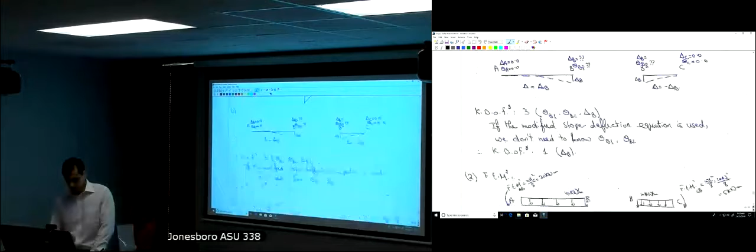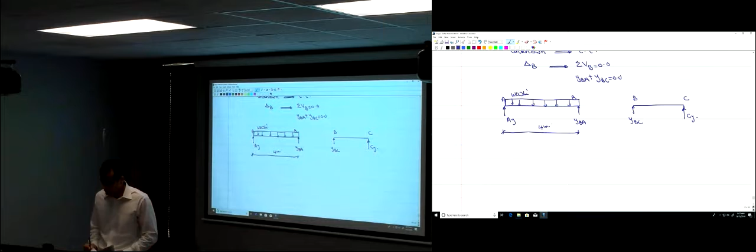The length of that member is 4 meters. We have an AY, YBA, and I'm just going to remove this uniformly distributed load and put an equivalent force. How much would that equivalent force be? 40 kilonewtons, 10 times 4, right in the middle.

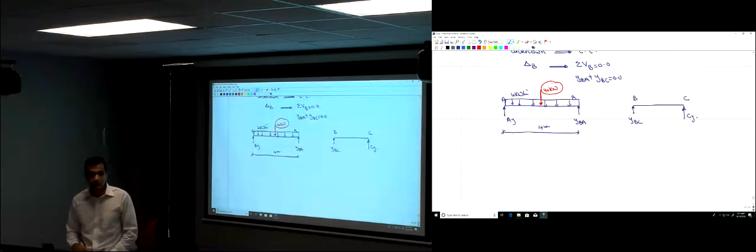Am I missing anything here? I'm drawing the free body diagram of member AB. This is the free body diagram of member AB, your moment at A.

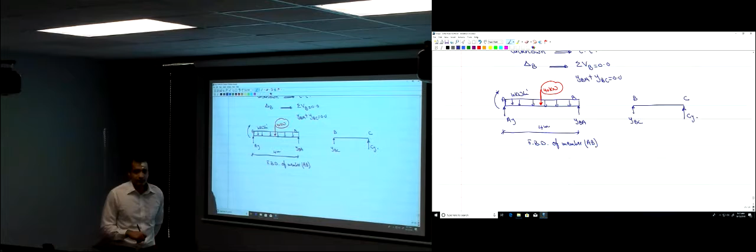Do you know how much is the moment at A? Still, you didn't calculate it yet. So just put it in the positive direction, according to the slope deflection notation. So this is MAB. You don't know how much MAB is, but this is now the free body diagram of this member.

So now, let's study the equilibrium of member AB. I'm just going to take the summation of the moments about point A equal to 0. What do I have here? I have negative MAB, it's rotating in a clockwise direction, and then negative 40 kilonewtons multiplied by 2. What else do I have? YBA. Positive YBA multiplied by 4 meters equal to 0.

From this equation, I would find Y, this is YBA. YBA would be equal to... just move those terms to the right side of the equation so they become positive. So we have MAB plus 80, and then you divide this by 4. So YBA is equal to MAB divided by 4 plus 20 kilonewtons. I'm just going to call this equation 3.

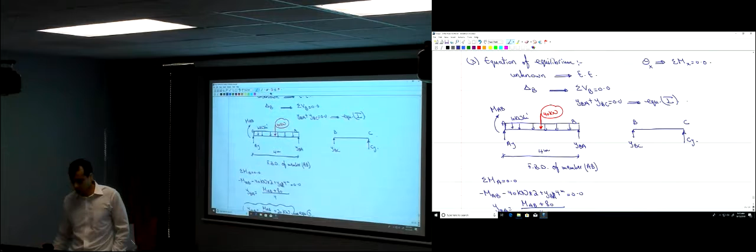Here we have this equation, I would name it equation 1. So now, what I just did, I represented YBA as a function of MAB. Why is that? Because I had an equation for MAB that is related to delta, the delta B that we're looking for.

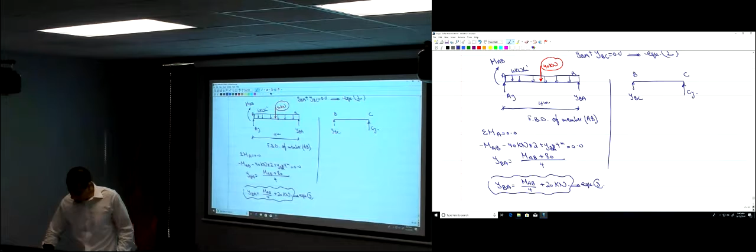Now, I want to do the same thing. Study the equilibrium here of member BC. So I need to draw the free body diagram. So all the loads, I have to draw all the loads here. You have a uniform load. The length of this member is 2 meters, you have 10 kilonewtons per meter applied on it.

So you're just going to remove this uniformly distributed load and put its equivalent force. How much would that be? 20 kilonewtons right in the middle. What else do I miss here? Moment at C, the moment at C.

Do you know how much is this? No, you still didn't calculate it, you just name it MCB. Since you didn't calculate it, just put it in the positive direction. What is the positive direction? Down. Clockwise.

So now, I need to calculate YBC. How to calculate YBC? Summation of the moments at C equal to 0. So now we have, if I take summation of the moments at C, we have negative MCB, we have YBC multiplied by 2 meters. What else? 20... this is negative, sorry, and then positive 20 kilonewtons times 1 meter equal to 0.

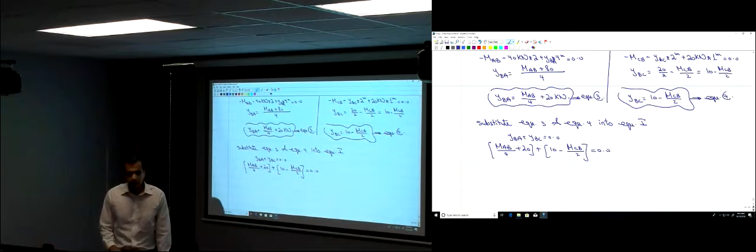Did I reach what I'm looking for? Why am I writing the equation of equilibrium? What's the purpose of writing the equation of equilibrium? Find delta. Is this an equation in delta? Do you have delta here? So where would you get the delta?

We could solve for MAB and MCB and plug them back in. Exactly, so substitute equations 1 and 2 into this equation.

Okay, so we had MAB. How much was MAB? MAB was negative 3EI divided by 16 delta AB minus 20, right? So you divide this by 4 and then add 20. So this becomes, the first term is negative 3EI divided by 64, because you divided 1/16 by 4, so that becomes 64 here. And then here you have this delta B, and then plus 15. And then the other part here, this becomes 7.5 minus 3EI divided by 8 delta B.

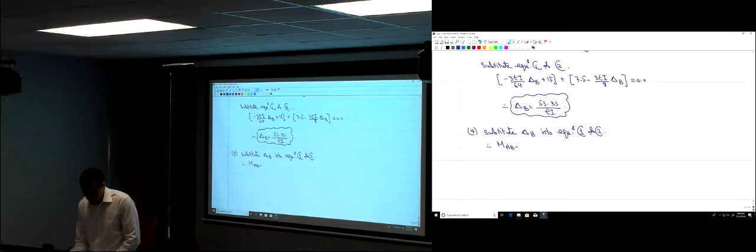So you will find that MAB is negative 30 kilonewton meter, and MCB would be 45 kilonewton meter. So now our beam looked like this.

This length was 6 meters. Now I know those moments. How much is MAB? It's negative — according to the sign rule for the slope deflection, this came from the slope deflection equation. Negative is counterclockwise, so it's in this direction, 30 kilonewton meter. MCB is positive, so it's clockwise, 45 kilonewton meter.

Now you can go ahead and draw the bending moment diagram. How to draw it? Just take the moment at the critical points. What are the critical points here? Just point A and C. What about point B? Point B is not an end of a uniformly distributed load.

You can think of this as just one load — there's nothing interrupting it other than this internal hinge. For drawing the bending moment diagram, if there's no concentrated force or a uniformly distributed force that ends there, you don't need to calculate the moment at point B. You can just treat this as one uniform load from start to end.

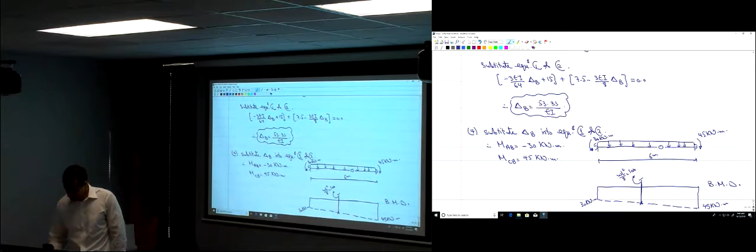So here the moment is negative 30, and here this is negative 45. Then you connect those two points by a dotted line, and from the center you go up by WL squared divided by 8. W is 10, L is 6, so 6 squared divided by 8. This becomes 45, so definitely you're going to go up — it's going to be positive, and it goes like this.

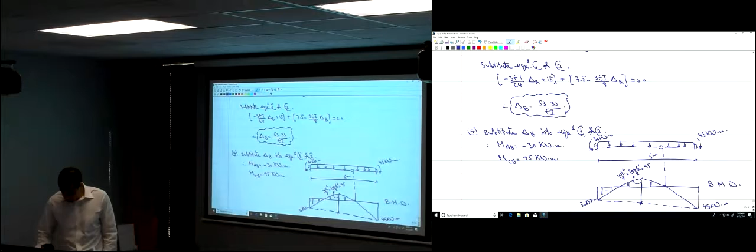So that's the bending moment diagram. While drawing it, you just have to see that the moment passes through 0 here. And then you do the hatching — negative here, and positive here.

Any question? Yes — for that one, is that just going to be an eyeball thing? Do you just eyeball the midpoint and use that equation, or is there something more specific you're looking for? Of the dotted line, I think you're talking about. Yeah, of the dotted line — the middle of it. We're just close enough to the middle, eyeball it? Are you talking about the maximum bending moment, or what? You said it's the midpoint of that line.

No, to draw the parabola you need a third point. The third point is not the maximum point — it might be or it might not. Here it's not. You just have to find it in the middle, so this part has to be equal to this part, and then you go up by WL squared divided by 8. You have a third point, and the curve passes through this third point. But this doesn't mean that this value is the maximum bending moment. The maximum bending moment occurs where the shear is 0 — to find Mmax you need to find where the shear is 0. So here, this might be a little off from the maximum point. This value gives you an approximate value of the maximum bending moment, but it's not the actual maximum.

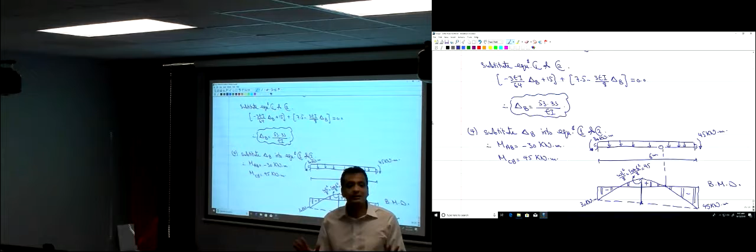You use the sign rule that we used in structure analysis 1. What does that sign rule say? If the moment is going downwards, whether it's clockwise or counterclockwise, I don't care. If it's going downwards, then it's negative. If it goes upwards, then it's positive.

So now, when I calculated those moments, where did I calculate them from? I calculated them from the slope deflection equation. So a negative here, since this comes from the slope deflection equation, means it's counterclockwise, so I just draw it as counterclockwise. This one was calculated using the slope deflection equation too, so clockwise is positive, so it's clockwise.

Now I want to draw the bending moment diagram. Those are going downwards, so they are negative moments. Is it clear?

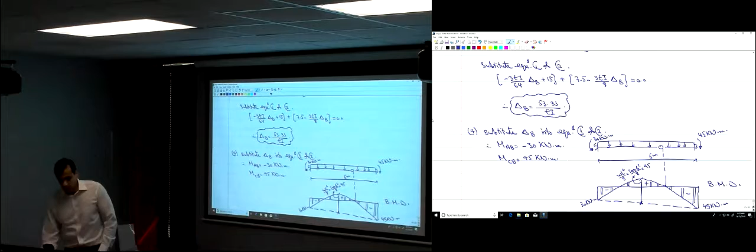So now we want to move to a new topic that was not covered in structure analysis 1, because it doesn't apply to determinate structures. It only applies to indeterminate structures. What is it that we want to cover now? It's the movement of supports.

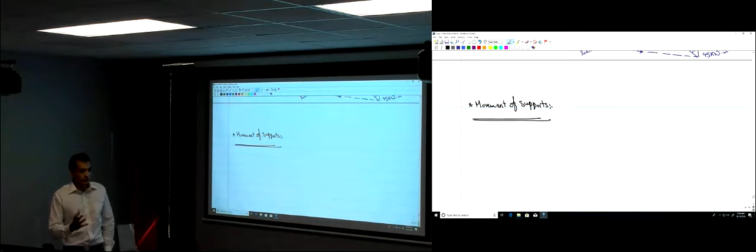What does movement of support mean? The support is the point where it constrains the movement of your structure. For example, when we say you have a fixed support, it means the deflection is 0, the rotation is 0 — no vertical movement, no horizontal movement, no rotation. When we say a pinned support like this, it means there is no vertical or horizontal motion. When we say a roller support like this, it means there is no vertical motion at all.

Now we're saying movement of supports. Do those two words make sense together? Movement of support — the support prevents the motion, but now we're saying no, it's moving. The support can move. Does this make sense? According to just basic things, no, it doesn't make sense.

But in real life, supports actually do move. And it doesn't mean that your structure went out of equilibrium — it's still in equilibrium. So how can a support move and still be a support?

Simply, let's see a very large problem here. Let's say you have a real building like this, a building frame, and now you have supports here — let's say you have some supports here.

What does this support come from? What is actually supporting this structure that I drew this fixed support for? The ground, the earth, right? So that is the support. So actually you have some ground here — this is the earth here. That's the support of your structure.

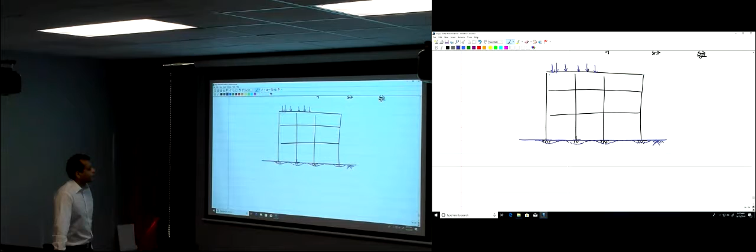Definitely you're going to study this in Dr. Said's soil mechanics course, the settlements or the deflection in different soils. So, did anyone take this course with Said yet? Deflections, okay. What would you call this in soil mechanics?

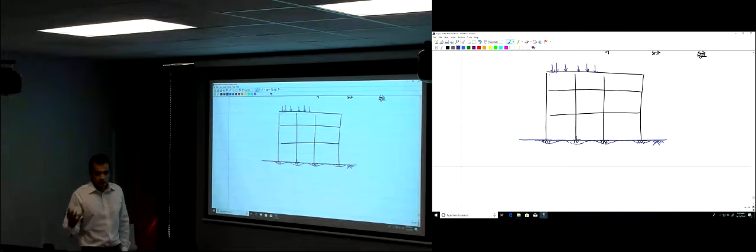Differential settlement. Okay, but do you have soil consolidation? Yeah. Okay, soil consolidation. So you had experiments on how to measure the soil consolidation. You had equations for this, and you actually can measure, or the equation gives you, the soil consolidation over time.

We just need to understand this. We don't need to calculate it, but we just need to understand that there will be some settlement in the soil. So now, although I'm putting some fixed supports here representing the interaction between the soil and the building as fixed supports, those supports are going to move down.

So the support is going to move down. The entire building is going to sink down a little bit. If the loads on those columns are relatively equal to each other, and we have the same type of support, it means that the entire building is just going to move down with the same magnitude at all of those points.

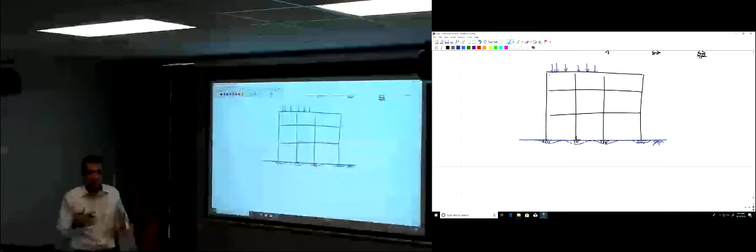If this happens, there is no differential settlement between the points. So you can just neglect this movement of support. It won't have an effect on your structure. The entire building just moved a little bit down.

The problem would happen if you have a soil here. It looks like the same soil, but actually what you have is rock here, and then suddenly you have some clay on top of it. So here, the settlement of this support will be so small, almost zero, because you have rock.

Bedrock here, almost zero. Maybe here a little bit. Here it's going to be so large, because you have soft clay. So what will happen is this point is just going to move down like this. It's still a support, still supporting the building, but it's going to sink down more than the rest of the supports.

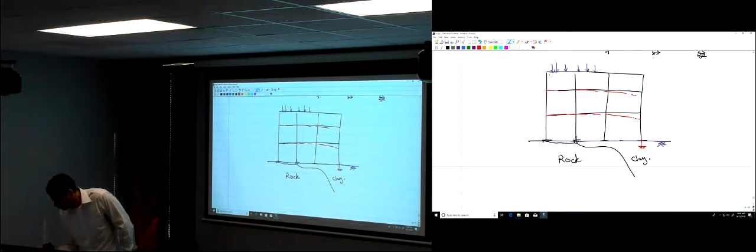So what will happen is your building, the entire building, there will be deformation in that building due to this differential settlement between the supports. So, okay, that's fine? No, that's not fine. As you see, this deformation in the building has exactly the same action as if you applied some load on your building.

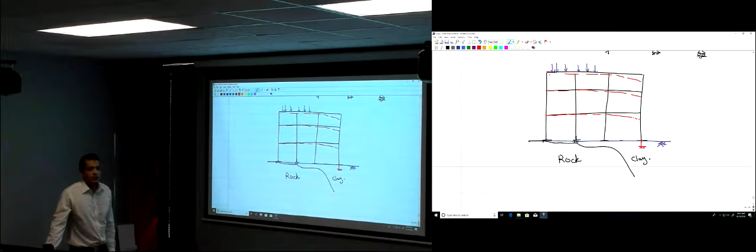So just having a differential settlement, this is a load on your building that will result in some internal forces, bending moment, as you see here. Just this deformation will result in some bending moment in those beams. So why didn't we discuss this earlier in structural analysis 1, when we were discussing determinate beams or determinate structures in general?

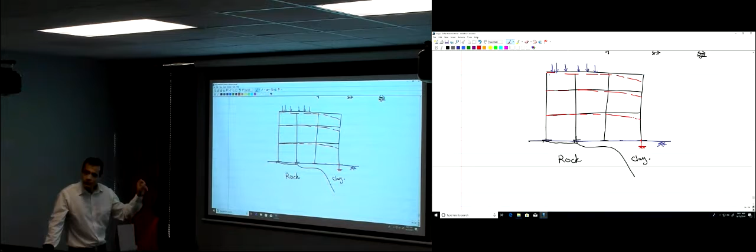Because this differential settlement, this movement of supports, has no effect on determinate structures. It only has an effect on indeterminate structures. Why? Let's draw a determinate beam here to understand this.

Let's say here you have a very simple determinate beam, and then I'm telling you that this point here just moved down. There was a settlement of this support, and there was no settlement here. What would happen to the beam? It would deflect like this.

But since it's determinate, this point can rotate easily, this point can rotate easily, it's just going to be a straight line. I have this pen like this, and then I move it like this. Is there any internal forces due to this movement? No, it's just a movement with no internal forces.

But the problem comes when this becomes an indeterminate beam. The more fixation you have, this moves down now. It moved down, but it's not allowed to rotate. So there will be some curvature in it. Now it's bending, okay? Here it was not bending, it just rotated like this. Imagine now I'm fixing this, and then I have to move it, so it's just going to bend. Let's exaggerate this.

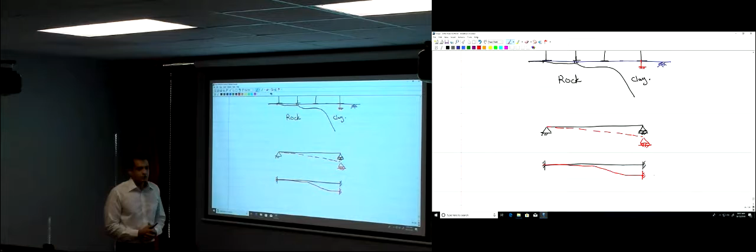It's going to bend because it's an indeterminate beam—there are more supports than needed. This deflection will result in some internal forces, but here it won't result in any. Yes, there is a settlement of support, but it doesn't have an effect. In indeterminate structures, this settlement of support has a huge effect.

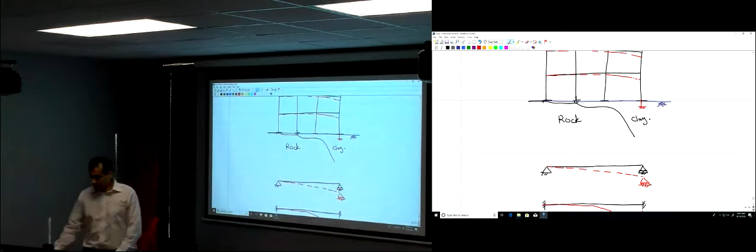So now we understood the meaning of movement of support. We took an example here of this movement of support. Let's see another example of how movement of support can happen, another reason for movement of support.

Before we continue, I want to write this here: no effect of movement in determinate structures. Here, there is an effect—on the moment, or the internal forces generally.

Another example of what would cause a movement of support. Let's say you draw a beam like this—close to the example we're going to solve soon, in a few minutes. You have a beam like this, I just drew it.

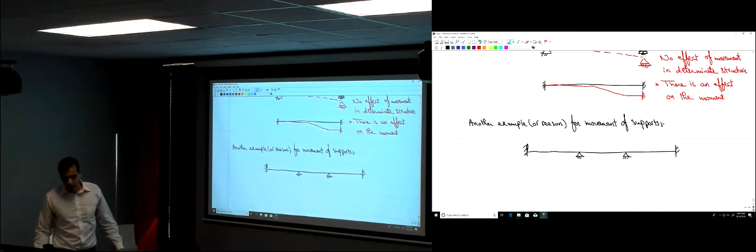When you have a beam like this, it's just a beam in a building—I just cut it out of a building. I have this type of supports. Where do those supports come from? There is something that is supporting it. We said this is the idealized structure, right? In real life it doesn't look like this, it's not a line. The supports—there is something giving you the support.

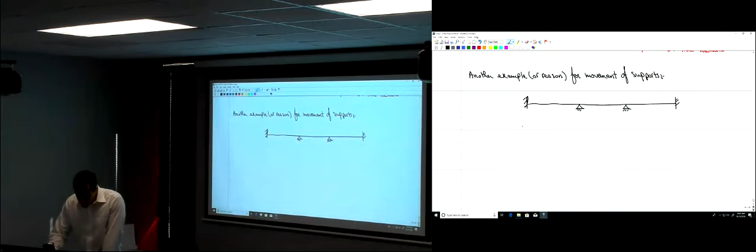So what would that beam be like in real life, in a real building? Maybe here this support is a column like this, and then here you have your beam. This column maybe continues to the second level or the next level. Here you have some supports—where does this support come from? Maybe you have another column that's supporting your beam here.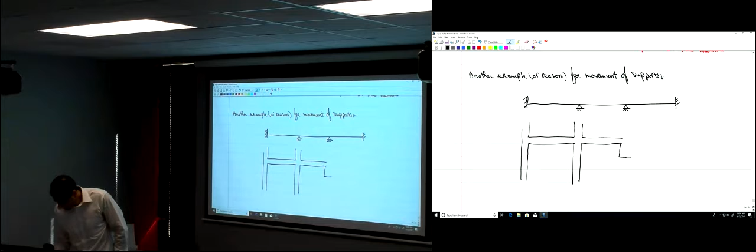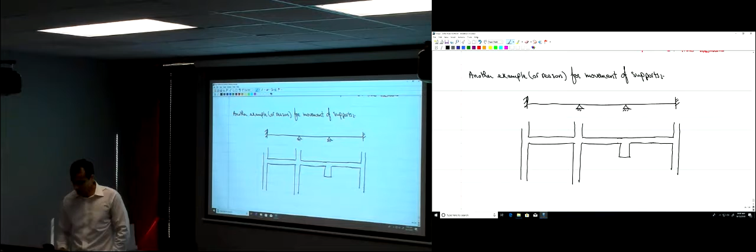And then we have a support here—maybe it's a column, or maybe it's another girder, a larger beam that is supporting this beam in the opposite direction. And then here we have this fixed support—what's that? Maybe it's a column. So here we have this girder.

And then you have your loads applied, coming from the own weight of the structure. You're an expert on this from Structure Analysis 1, right—calculating the dead load, the live load, rectangular, triangular loads. You did this in Structure Analysis 1, you understand all of those things. So now when you apply those loads, what will happen to this beam? It will deflect, there will be some deflection.

So now let's draw the center line of this structure, let's draw it in blue—this is the center line. I'm idealizing this here as a fixed support, this as a support here, this as a support here, and this here as a fixed support.

And then, due to the applied load, it's going to deflect—there will be some deflection. The thing is, what do you expect of the deflection here compared to the deflection here? You would say, no, those are supports, there is no deflection at those supports. Yes, this is a column, so most probably it's not going to move a lot. There will be some, depending on the normal force, the axial force in this column, there will be a very, very small deformation in the column. Do you know how much is the deformation in this column?

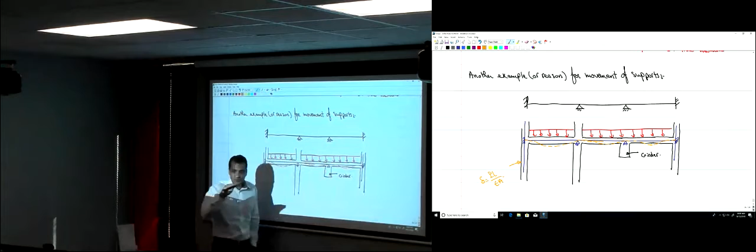The deformation here is delta, which is PL divided by EA—the axial force multiplied by L divided by EA. It's a very, very small deformation. Here, this is a column, it's going to have a small deformation. But here, this is a beam—the deformation here, this beam is going to move down a little bit, because there is nothing actually supporting it. It's maybe supported at the ends of the girder, but not in the middle. So there will be some settlement compared to those columns—some settlement of support here at this point.

Compared to the other supports, this one is not a very rigid support. It's a girder that can deflect a little bit when there's a load applied on it. You can calculate this deflection according to what you learned in Structural Analysis 1 and in mechanics of materials, using the conjugate beam method we studied this semester. So there will be some deflection, but it's going to be so small it can be neglected compared to this one, which is definitely much larger.

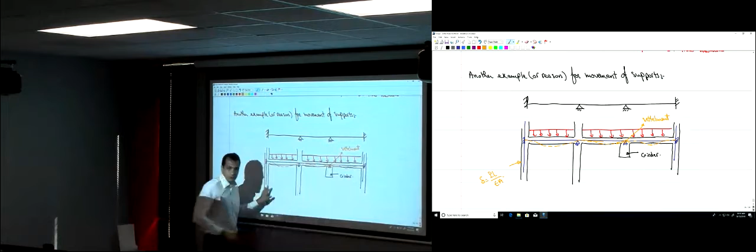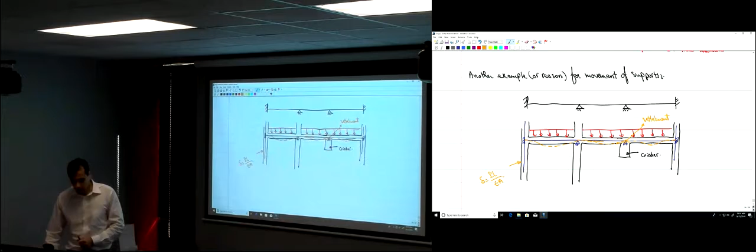So this is like a settlement of support compared to the other supports. This support will settle down compared to the others. If this is an indeterminate beam, this settlement of support will have an effect on your bending moment diagram. If it's a determinate beam, it will not have an effect. So how do we take this into consideration? Just put it into the slope deflection equation.

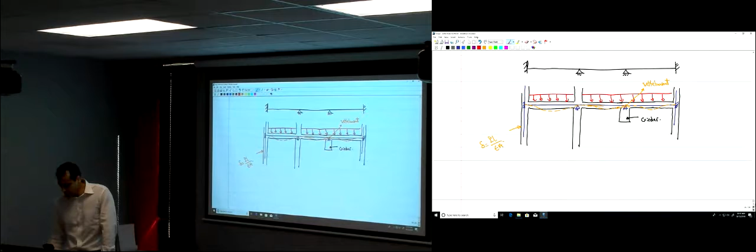Let's see an example. Now we understand what's meant by settlement of support. It's still a support - this girder is still supporting the beam, but the girder is going to move down a little bit due to the applied loads on it. How can we manage to take this into consideration when solving our problem? It's so easy, so straightforward.

Let's take an example on how to account for this settlement of supports. In the textbook it's example 11.4, but I modified it a little. This is on the movement of supports. In this example we have a beam like this, exactly like the one we just discussed. We have points A, B, C, D with given lengths: 7.2 meters, 6 meters, 4.5 meters. On span AB there is a uniform load of 20 kilonewtons per meter.

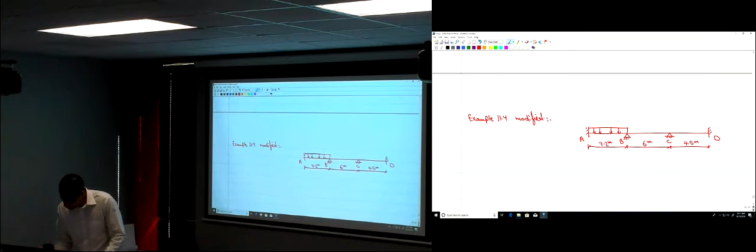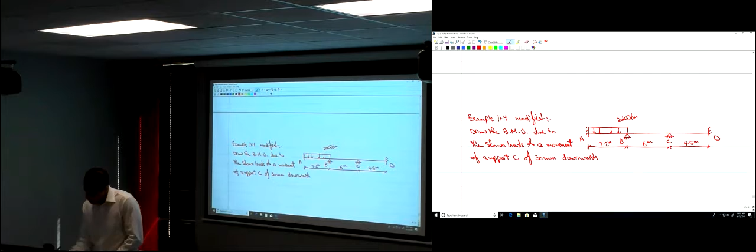What's the problem statement? What are we required to find? We need to draw the bending moment diagram due to the shown loads. But not only the shown loads - there is also a movement of support C of 30 millimeters downwards. Where did this come from? Just explaining - maybe some settlement of that support, maybe they are all columns and this is just the girder.

We're given here something very important. When you consider the movement of supports, in the previous problems EI was just a constant value that would cancel out. Here you need to know how much EI actually is. So E is 200 gigapascals, and I of this beam is 600 times 10 to the power 6 millimeter to the power 4.

So now for the solution. First we have E and I - let's multiply EI, because we have 3EI or 4EI divided by L, right? We have EI as a constant, so let's calculate this constant, E multiplied by I.

E is equal to 200 gigapascals. Is this unit, gigapascal, consistent with the units in this problem? What's a gigapascal? It's 10 to the power 9 Pascal. What is a Pascal? Newton per meter square. Is this consistent with the units we have? Almost - here we have meters, the distances are in meters, but the load is in kilonewtons, not Newtons. So to get consistent units, I'll divide by 1,000, giving 200 times 10 to the power 6 kilonewtons per meter square.

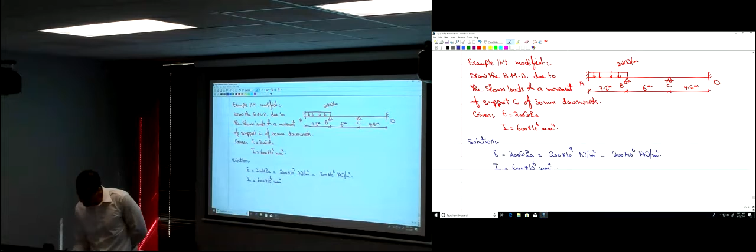What about I? We have it as 600 times 10 to the power 6 millimeter to the power 4. Is this consistent with our units? No - the length here is in meters, so I needs to be in meters too. How do we change millimeter to the power 4 into meter to the power 4? Multiply by 10 to the power negative 3 for millimeter to meter, but since it's to the power 4, it becomes 10 to the power negative 3 to the power 4, which is 10 to the power negative 12. So this becomes 600 times 10 to the power 6 times 10 to the power negative 12 meters to the power 4, which simplifies to 10 to the power negative 6.

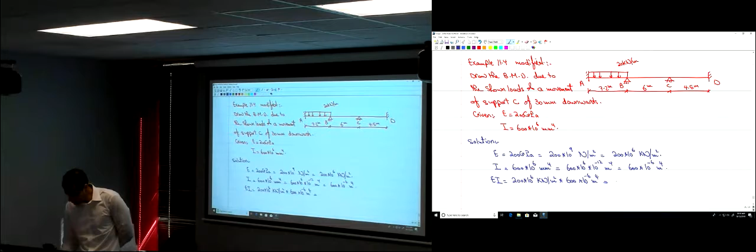So now how much is EI? 200 times 10 to the power 6 kilonewtons per meter square multiplied by 600 times 10 to the power negative 6 meter power 4. The 10 to the power 6 and 10 to the power negative 6 cancel together, and then 200 times 600 gives 12 times 10 to the power 4 kilonewtons meter square, which is consistent with the units in our problem. So this is the constant EI. Anytime you have EI, just plug in 12 times 10 to the power 4 kilonewtons meter square. That's EI, calculated before we start solving.

Now we want to solve this problem. You solve it, just let me know what are the steps. How are we going to solve it? Using the slope deflection method that we learned. Break the beam and follow the steps of slope deflection.

Break the beam into individual members and find the kinematic degrees of freedom. How many members do we have here? 3. A-B, B-C, C-D. So 3 members here. Let's find the kinematic degrees of freedom.

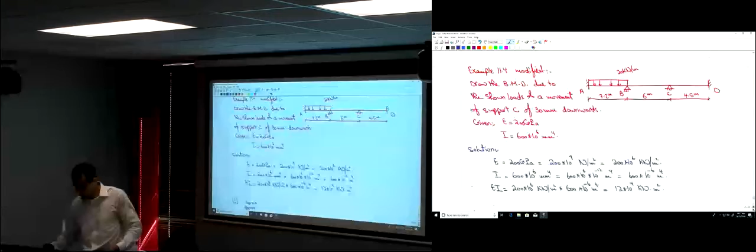Point A: what's the deflection at point A? 0. What about theta A? 0. At B: deflection is 0, theta B is unknown. What about point B in the second member? The same, delta B is 0, and theta B is the same value as in member AB.

What about point C? How much is delta C? It's not 0 - it's a support, but that support moved down a little bit. How much is that? 30 millimeters, which is 3 centimeters, so 0.03 meters, downwards. Is that positive or negative? What did we say about delta for the slope deflection equation? If it causes the member to rotate in a clockwise direction, it's positive. Did the member rotate clockwise or counterclockwise? Clockwise, so it's positive.

What about theta at C? Unknown. Let's move to member CD. How much is delta here? Here, delta in this member is also 0.03, the differential settlement between those two points. What about point C here? Same magnitude, but negative, because this member rotates counterclockwise. When point C moves downward, it rotates counterclockwise, so here delta is negative 0.03 meters.

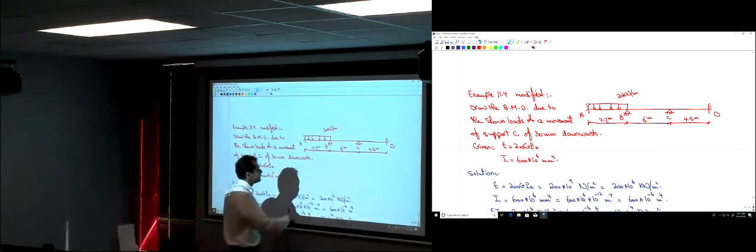So there is no member where the moment is going to be 0. I find some students, especially in problems like this, look and say oh, there is no load here, so MB must be 0, MC must be 0. No - if there is no load, the fixed end moments due to the loads are 0, but that doesn't mean the moments are going to be 0. The moments in the member depend on the loads and the deformation of the ends. There is a theta B, theta C, and delta C, so there will be moments in member BC - some bending moment. So now, the fixed end moments.

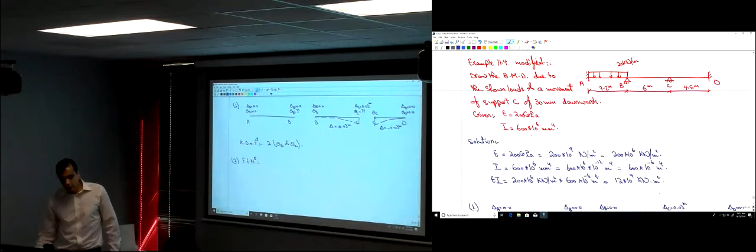We don't use the modified one, we use the regular ones, okay? Where would you have fixed end moments? Only in member AB, because this is the only member that has loads, okay?

So for member AB, how long is it? 7.2 meters. You have a uniform load here of 20 kilonewtons per meter. So there will be some fixed end moments here: WL squared divided by 12, and WL squared divided by 12. So this is 86.4 kilonewtons meter, and this is 86.4 kilonewtons meter.

Is this positive or negative? And this one? This one is negative, it's counterclockwise, okay? What determines the rule? You're using this for the slope deflection equation, so you have to adhere to its sign rule. Counterclockwise is negative, and this one is clockwise, so this is positive. So now that means the fixed end moment of AB is negative 86.4 kilonewtons meter, and the fixed end moment of BA is positive 86.4 kilonewtons meter.

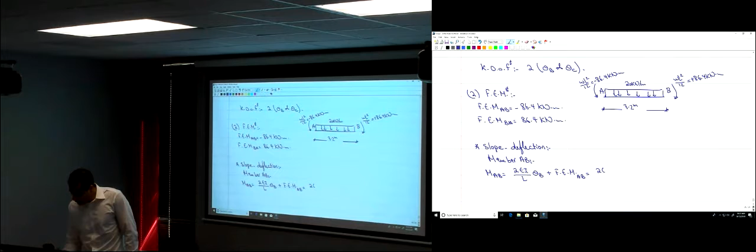And then plus the fixed end moment of AB. So here we have 2EI, okay? You can substitute EI now, just substitute the value of EI at the end, whatever you want, okay, divided by L, which is 7.2 meters, multiplied by theta B, plus the fixed end moment, which is negative 86.4 kilonewtons meter. So that's equation 1.

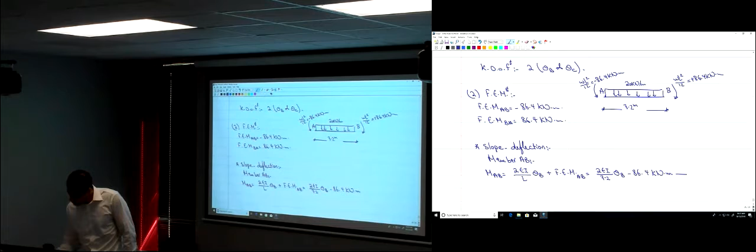There were other terms, but all of them cancelled. The two terms, the one that depended on theta A and the one related to delta, are both zero, so I didn't write them.

Okay, and then MBA. How much is MBA? 4EI divided by L multiplied by theta B. So 4EI divided by L, theta B. What about the term with theta A? Zero, theta A is zero. What about the term with delta? Zero. Fixed end moment: 86.4, there is a fixed end moment at BA. So this becomes 4EI divided by L, which is 7.2, theta B, plus 86.4 kilonewtons meters. And that's equation 2.

So those are the two equations for member AB. Let's do the same for member BC. So what we're going to write here is MBC and MCB, both ends of member BC. MBC: you have 4EI divided by L, theta B, okay? So 4EI divided by L. How much is L, the length of that member? 6. Theta B, plus 2EI divided by L, theta C, which is unknown.

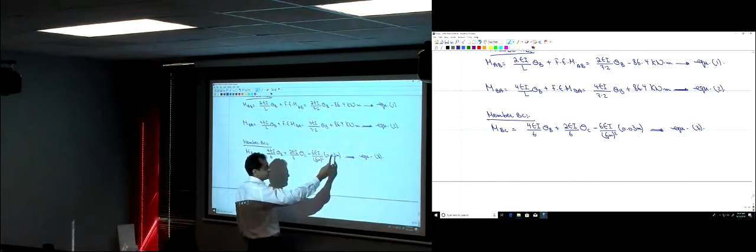So as you see here, you had some given quantity due to the load, the fixed end moment. Here you have some quantity, okay? It's given, it's a number, right? EI is known, it's all known. That is related to the settlement of support, so as if the settlement of support has the effect of a load on that member, as if that member was loaded. There were no loads, but now you have a term that is equivalent to the fixed end moment.

And then MCB, it's 4EI divided by L, theta C, plus 2EI divided by L, theta B, minus 6EI divided by L squared, multiplied by delta. And that's equation 4.

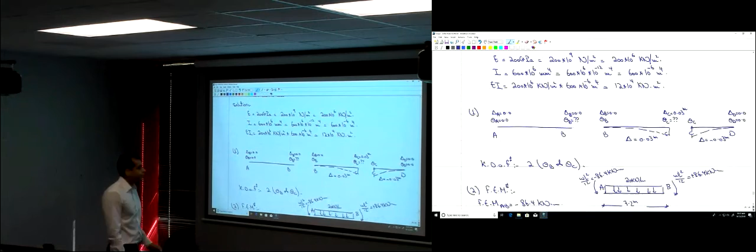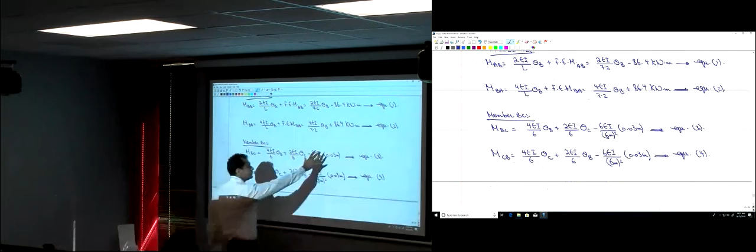And here I'm going to stop a little bit, because this is one of the very popular mistakes that I see on tests. When you put delta here, it doesn't change its sign in the member. I see some students, when they apply the slope deflection equation at point B, they say delta at point B is 0, so they just put this delta equal to 0, because the deflection was at point C, not at point B.

No, the deflection here is not the deflection at point B. It's the relative, the differential deflection between the two ends of the member, whether it's at B or at C. It's not 0 here. Yes, the deflection at point B is 0, but this equation is written for member BC. There is a relative displacement between point B and C. So it's not 0, even if delta B is 0, but delta C is not 0, so there is a relative displacement between the two points that you have to plug in.

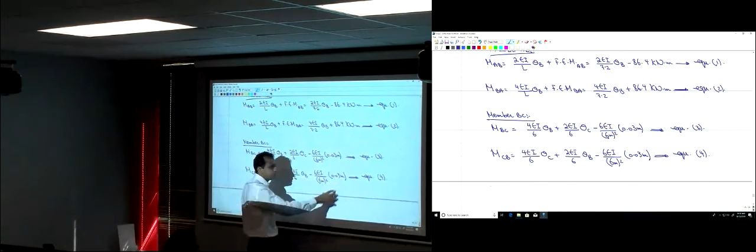If this is 0.03, it's the same magnitude here. I see some students plugging here equals positive and put it here negative, saying, oh, they are opposite each other. No, the member rotated in a clockwise direction. That's it. It's positive for both points. It's the same member.

See, I'm stressing on this, okay? If you do it wrong on the exam, it's your problem. I'm sure I will see some students doing this wrong. And you know, after the exam, I will have you in my room to see your exam paper. I will just remind you this.

So this is, don't forget, delta is in the member, it's not at the point. If there is a delta in the member, there is a delta in the member. Whether the point moved or not, there is a relative displacement between the two ends of the member, there is a delta in the member, okay?

And then let's do member CD. What's the two ends of the member? MCD and MDC. What's MCD? 4EI divided by L. How much is the length of member CD? 4.5, multiplied by theta C. Plus 2EI divided by L theta D. How much is theta D?

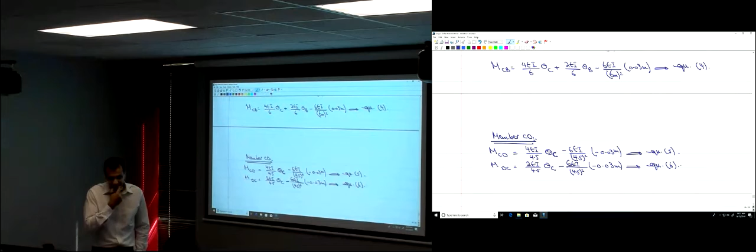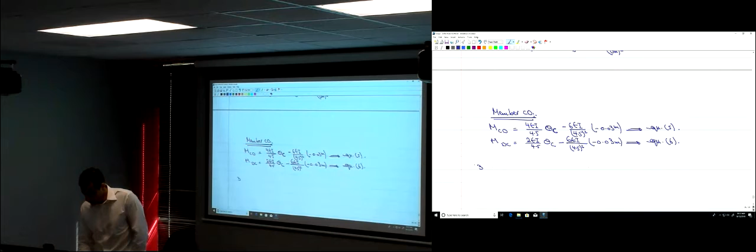Now, we had 6 equations. We wrote all the slope deflection equations. What should you do next? Plug in the known information. Equations of equilibrium. So the third step, you need equations of equilibrium.

How many equations of equilibrium do you need here? 2. Why 2? Because you had 2 unknowns. What are the 2 unknowns? Theta B and theta C. That means that what type of equation of equilibrium you're going to need. If theta B is unknown, how would your equation of equilibrium look like? The summation of the moments about point B has to be equal to 0.

Theta C is unknown. How does the equation of equilibrium look like? The summation of the moments at point C is equal to 0. Where did this come from?

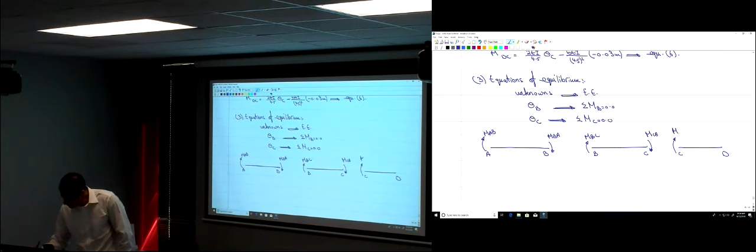If you draw the free-body diagram of the 3 members, this is A, B, B, C, C, D. You have an MAB. You have an MBA. You have an MBC. You have an MCB, you have an MCD, and you have an MDC.

So simply those 2 moments has to be equal and opposite, right? Which means that the summation of them is equal to 0. Those are the two moments at point B. The summation of them has to be equal to 0. Those two moments here, their summation has to be equal to 0.

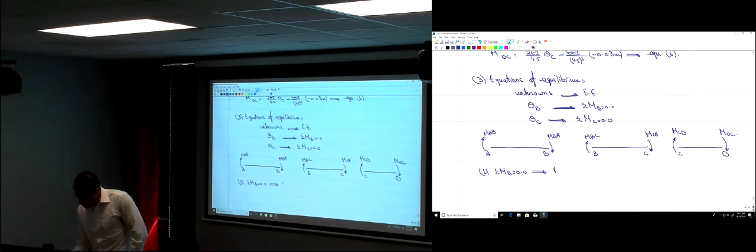So let's apply the first equation here. The summation of the moments at point B has to be equal to 0. Those are MBA and MBC. Has to be equal to 0.

So you just substitute their values, get the values from the equations, okay? Let me grab those here, okay?

MBA was 4EI divided by 7.2 theta B plus 86.4 plus MBC, which was 4EI divided by 6 theta B plus 2EI divided by 6 theta C minus 6EI divided by L squared, 6 squared, multiplied by delta. That's equal to 0. It's an equation in two unknowns. What are those? Theta B and theta C. Theta B and theta C are unknowns here. So this is equation 1.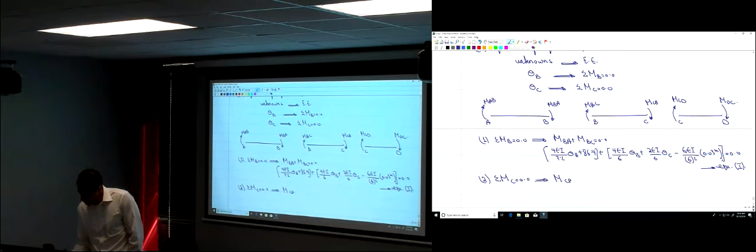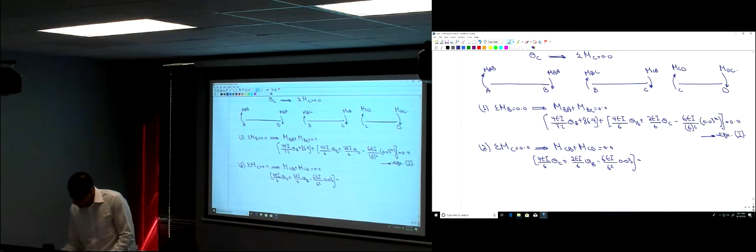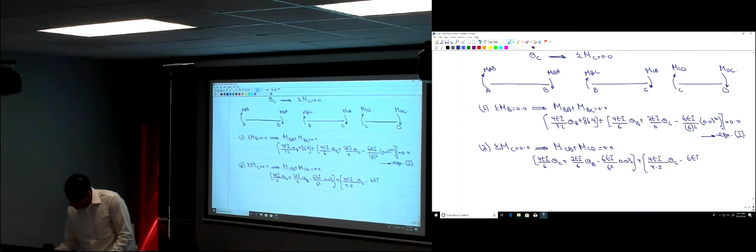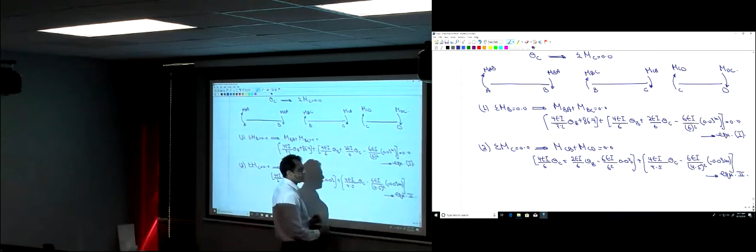And that's equation 2. As you see here, the most important thing that you have to realize here, if EI was not given, you would not be able to find theta B and theta C, because this term here is going to be difficult to solve. It's going to be a function of EI.

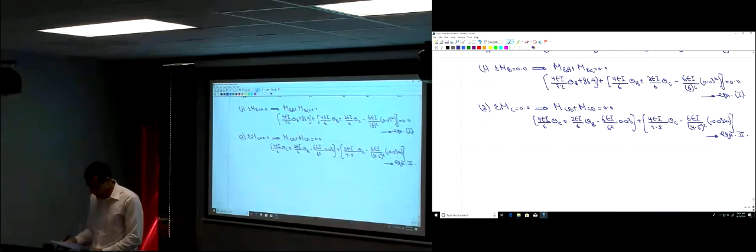So now, just plugging the value of EI that you had, and then solving the two equations. So solving equation 1 and 2, you're going to be able to find theta B and theta C. So theta B is going to be equal to 0.0044 radians, and theta C is going to be negative 0.0345 radians. Whereas EI, we always had something multiplied by EI when we solve this, right? Now you just plug the magnitude of EI, that's it. We had the magnitude of EI given, so it's just substituted here.

So once you find theta B and theta C, what would you do with them? Plug back in, substitute back into equations 1 through 6, and then draw your bending moment diagram and so on. If you do so, just as homework for you, I'm not going to grade it, I'm not going to take it from you. Just continue solving this problem, draw the bending moment diagram, okay? And then what I want you to do is resolve the problem, without this relative displacement, without this movement of this support C.

And draw the bending moment diagram and see what's the difference, the settlement of support. What changed in the problem due to this settlement of support C? Did the bending moment diagram change? Yes, definitely it will change. Just check that yourself, okay? Any question here?

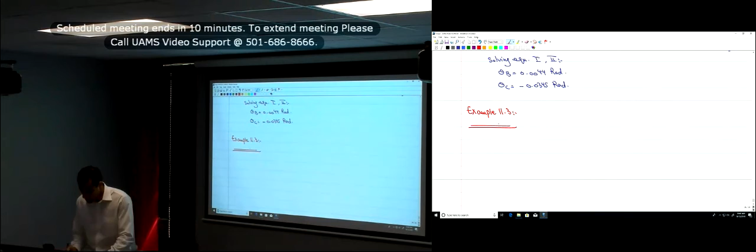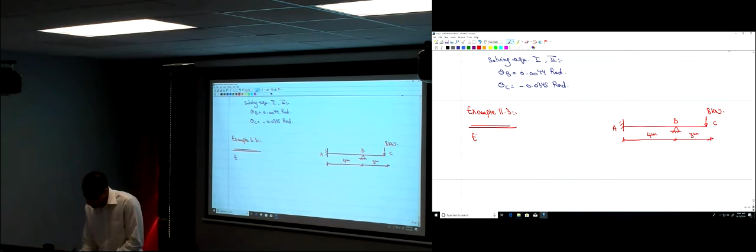So now, this is the problem that we're going to start solving next time. We have a member like this, A, B, C, and we have a load here, 8 kilonewtons. It's in the textbook, okay? This is 4 meters and this is 3 meters. And EI is given as 1,000 kilonewtons meter squared. And we're required to draw the bending moment diagram due to the shown loads and a movement of support B of 80 millimeters downwards.

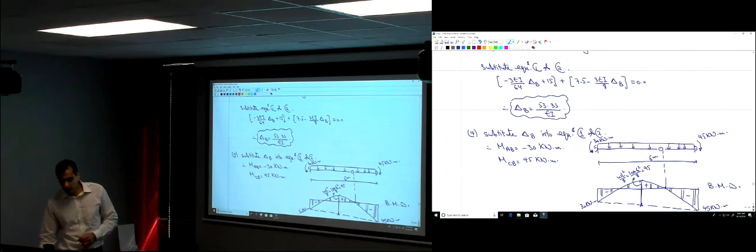To this problem here. The problem we started this time, we solved half of it last time and continued this time. The one with the internal hinge, when we said the shear is equal to 0 here, so the summation of those forces is equal to 0.

One mistake, a fatal mistake, that you can make in this problem. Actually, if I didn't tell you this now, I wouldn't blame any of you for making this mistake. But since I'm telling you this is a huge mistake, if you do it, it's fatal. The direction of those moments.

You're assuming the direction of those moments here. Some of you would say, okay, I'm assuming them, so I'm free to assume whatever direction I want. No. If you assume those moments in any direction other than the one I drew here, you're going to solve this problem totally wrong. Why is that? And what's the correct assumption you have to put?

You have to put them in a positive direction, because you don't know how much they are yet. You're only going to know when you solve and use the slope deflection equations. So they have to have the same positive direction as the positive direction of the slope deflection equations.

So this has to be clockwise, this one has to be clockwise. If you forgot what I just said and assumed this to be in some other direction, and expected this one to be in a different direction, just try to do this, and you're not going to end up with the same numbers that we got. Those are wrong. You have to stick to the positive directions of the slope deflection equation. Otherwise it's going to be wrong.

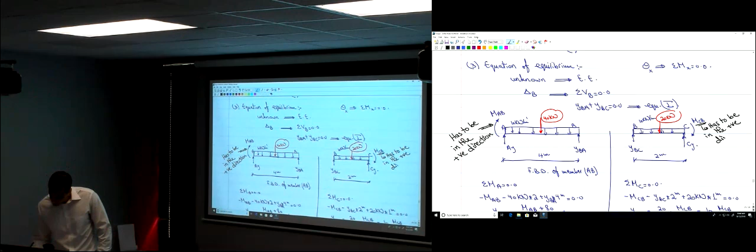Any questions? Okay, great. Thank you.